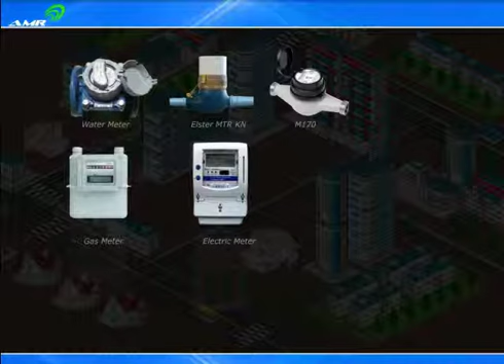Welcome to the AMR wireless OEM platform for smart metering. AMR smart metering enables utilities to monitor water, gas and electric meters remotely. Using GSV's wireless technology, AMR platforms can connect meters reliably across networks of any size. AMR smart metering can cover entire cities, homes, apartments and commercial buildings. The AMR technology reduces manpower, increases reliability and customer satisfaction.

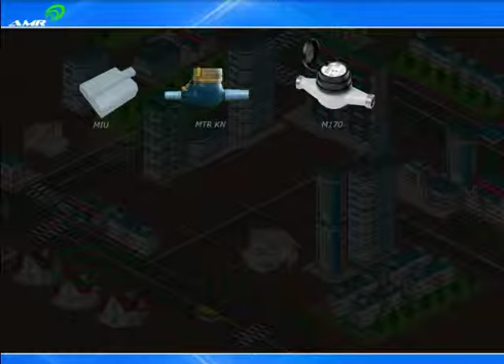There are two broad categories of AMR systems: walk-by or drive-by wireless, and fixed wireless system. Both these solutions are based on 4 core products.

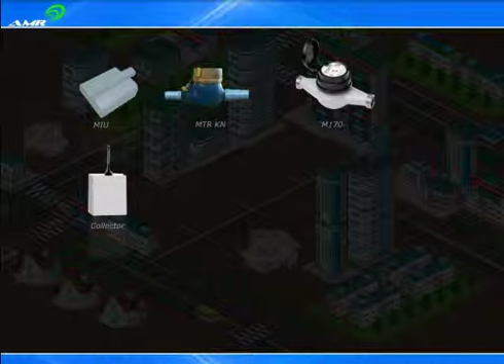First, meters are equipped with a wireless transmitter integrated directly or as an add-on module. Second is the collectors and repeaters that collect data from all meters within its range and transmit data over Ethernet or GPRS to and from the utility's backend system.

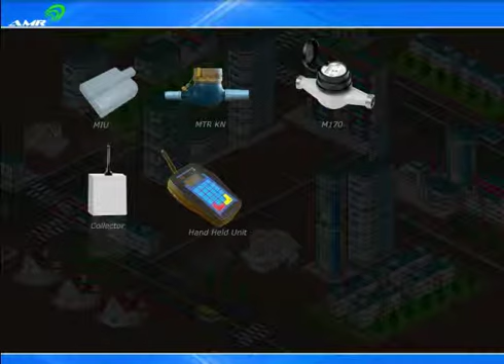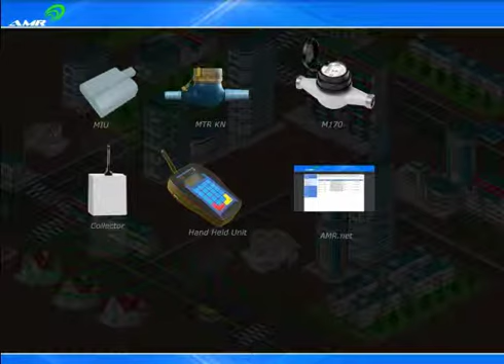Third is the handheld unit, a battery-powered unit which, when taken within radio range of field meters, collects data and stores it in its internal memory, which is then transferred to the utility backend database using a USB connection. Lastly is the AMR.net management software at the utility's control center. Our system provides complete coverage regardless of distance, number of meters or landscape.

Walk-by system. The AMR system consists of meter interface units (MIU), handheld units (HHU), and a PC-based station. The meter interface units are installed at each meter. During operation, the handheld units are taken past the MIUs either by walk-by or drive-by.

During this drive-by, the handheld unit collects the meter readings using a wireless link to the MIUs. These records are stored in the handheld unit's memory. The system does not require any repeater stations, since the handheld units will be driven past each MIU for reading the meters. This data can later be transferred to a PC station over a USB interface.

Fixed wireless system. The system consists of meter interface units (MIUs), which are installed at each meter, repeater stations which collect the meter readings from the MIUs, and a PC-based billing station which in turn receives the meter readings from the repeater stations through a system of collectors.

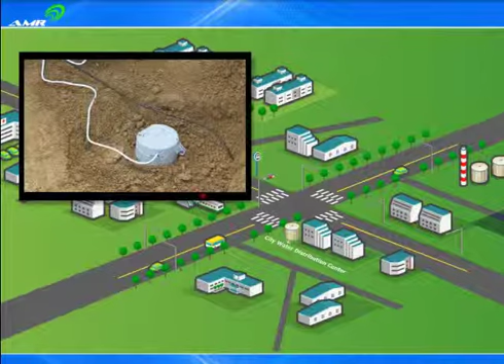The data is stored in the meter interface unit's internal extended memory. GSV's MIUs for bulk water meters can store forward flow, reverse flow, line pressure and leaks. The data can then be retrieved from these MIUs using 3 options: USB, RF modem, or GSM modem.

Here is an example of an Elster bulk water meter connected to a distribution pipeline. The Elster H4000 water meter is fit with an inductive sensor and the pipeline is fit with a pressure sensor.

GSV's FT200BM battery powered flow and pressure data logger collects the pulses from both the sensors and logs the flow and pressure parameters in its internal memory.

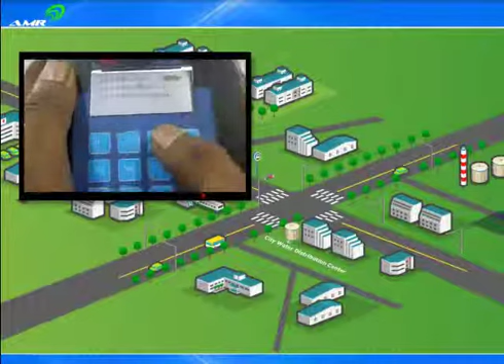The data from these data loggers can then be retrieved using a USB interface, RF modem, GSM modem, or a GPRS transmitter. Data can also be retrieved using an RF enabled handheld unit. These handheld units can be connected to a PC to upload the data.

Once the data is transferred to the PC, the AMR.NET software is used to prepare bills, generate consumption reports, revenue charts, and much more.

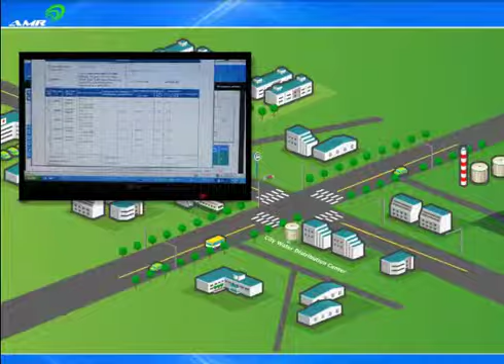AMR.NET enables you to manage distribution networks, flow parameters, and leaks in the system. Efficient use of the billing module automates much of your revenue collection and monitoring. Automated alerts and emails can be sent to users and customers.

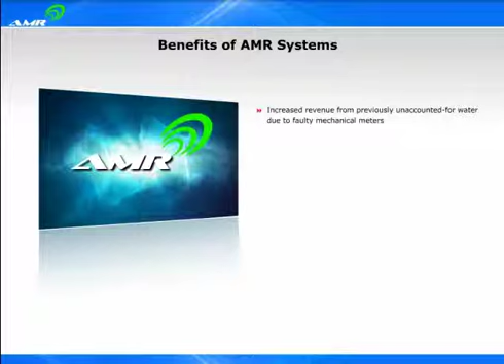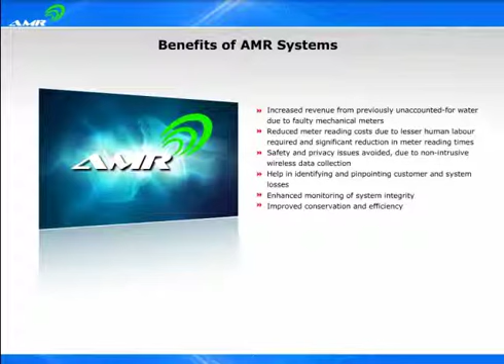Benefits of AMR systems: increased revenue from previously unaccounted for water due to faulty mechanical meters, reduced meter reading costs due to lesser human labor required, and significant reduction in meter reading times. Safety and privacy issues avoided due to non-intrusive wireless data collection. Help in identifying and pinpointing customer and system losses.

Enhanced monitoring of system integrity. Improved conservation and efficiency. Improved customer service. Help in detecting theft of service. More efficient billing. Improved cash flow. Outage detection and management capabilities.

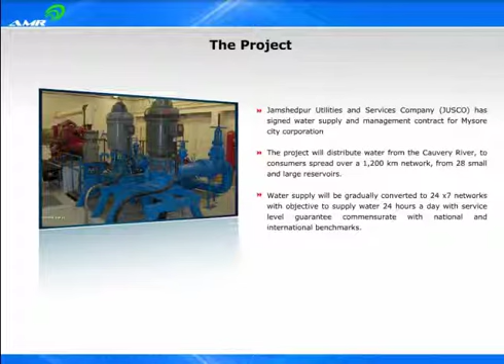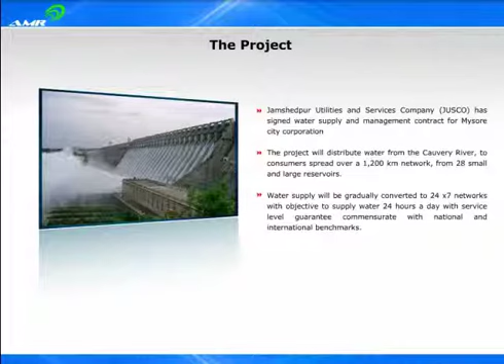Jamshedpur Utilities and Services Company (JUSCO) has signed a water supply and management contract for Mysore City Corporation. The project will distribute water from the Cauvery River to consumers spread over a 1,200 km network from 28 small and large reservoirs. Water supply will be gradually converted to 24/7 networks with an objective to supply water 24 hours a day with service level guarantees adhering to national and international benchmarks.

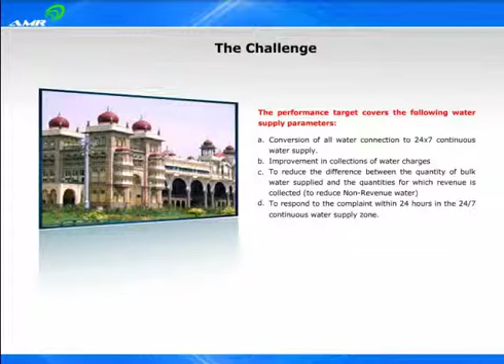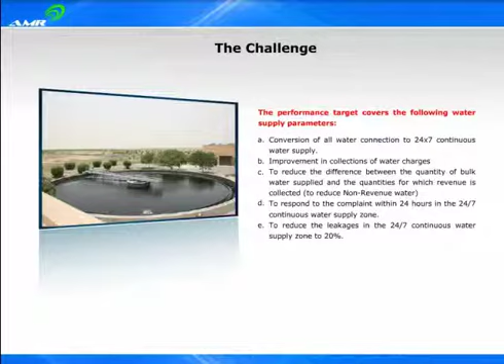The performance target covers the following water supply parameters: conversion of all water connections to 24/7 continuous water supply, improvement in collections of water charges, reducing the difference between the quantity of bulk water supplied and the quantities for which revenue is collected, responding to complaints within 24 hours in the 24/7 continuous water supply zone, and reducing leakages in the 24/7 continuous water supply zone to 20%.

The project concept was that Mysore has a very old water infrastructure and they wanted to revive it. So they approached the government of Karnataka and India to get project approval. Any project requires funding, so if it's a JNNURM funded project, that's where they can get a lot of money to do the total water infrastructure revival. But the main concept given by JNNURM was it should be a 24/7 project, only then would they fund it. That's why many people ask why this 24/7 project of this magnitude first came to Mysore, not even to the capital Delhi or business capital Mumbai, which are now also moving in that direction.

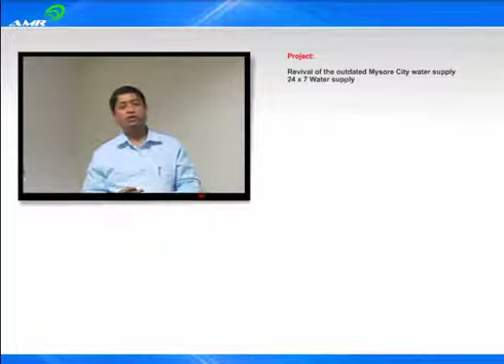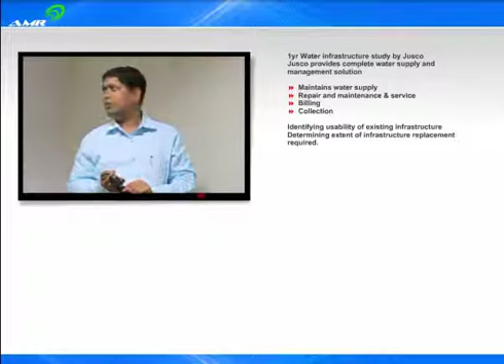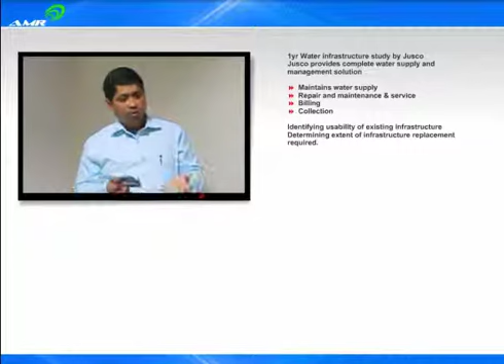The requirement was felt, it was approached, and the government felt it could be honored only if this 24/7 project was implemented. Where does JUSCO come in? It was a competitive international bidding process, and JUSCO quoted the best price. In the first year they studied the entire water infrastructure, the network, service conditions, and this project has a unique feature where you own the project.

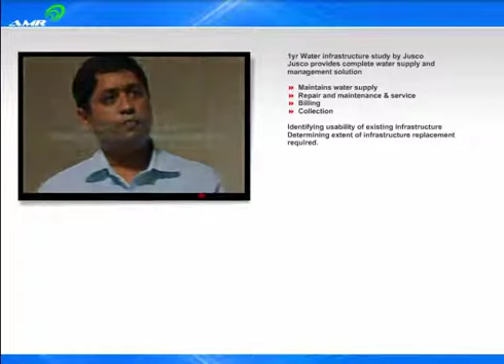So JUSCO first started one phase: to study the system and maintain it as it was during handover from MCC. This is what JUSCO is already doing and continuing to do. During the one year study period, they determined how many kilometers of the network needed to be revived or changed, since they weren't able to take the load or were worn off. PVC pipes were there, and in some places CI pipes. Sample tests and other tests were done on the CI pipes to determine how many kilometers could be retained, which are able to take the load.

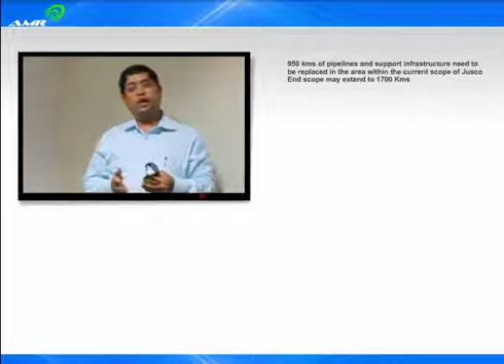It was found that out of the total city scope given, 950 kilometers of network needed to be replaced, which is a huge task. But when the total study was completed, this 950 transformed to 1700 kilometers. So our present BOQ limits us to only 900 to 950 kilometers, but our end scope may be 1700, where there's a chance of everything adding up. Our connections which were given as 1,17,000, we now find are 1,78,000 connections, around 2 lakhs. And in these 3 years, another 30,000 will definitely add up.

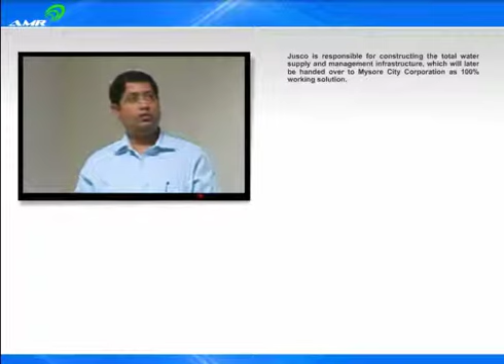I am in charge of the total construction phase, the rehabilitation we are doing for the entire network and systems. The operation team, as I mentioned, maintains the existing network. So finally, once I construct it, I will hand it over to my operation team. They will maintain it for the life of the contract, and then finally it will be given to MCC. This is what the job is.

It's all a team effort we are doing, and this is definitely a very good integrated solution which I find. I also came with a lot of queries when I planned this visit, and I felt many of those were answered before I came, answered in a very proper way, giving us a solution. See, if you show any product or system, you should try to give a solution to the customer or end user in a very user-friendly way. That is what the thing is. So, to my understanding, I do find that.

JUSCO made a critical decision and decided to focus on key technologies that would lessen their dependency on traditional systems and provide a viable solution for future development. A cost-benefit analysis identified significant direct hard cost savings over the life of the hardware by opting for Elster water meters equipped with AMR transmitters, when compared with the initial suggestion of using electromagnetic flow meters. In addition, they identified related benefits, both qualitative and monetary, to revenue and customer service departments.